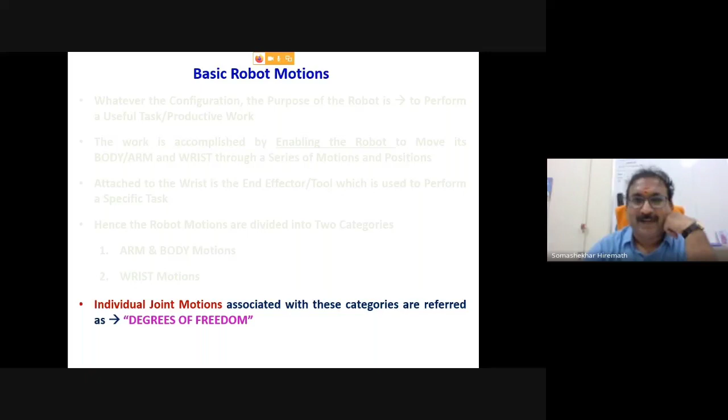Degrees of freedom are the motions. The minimum degrees of freedom required to place any object in space is 6, as I have told you: 3 major axes and 3 minor axes.

Let us see what is this arm and body. Now I am showing you the base here. Please see the base, and then the arm and body, all arm and body. The end is called a wrist. I've written here wrist assembly. Wrist assembly is like either a 2-fingered hand or a 3-fingered hand, whatever it is.

Now I am showing you the arm and body assembly motions. You'll concentrate on the axis I have mentioned here: rotational axis, vertical traverse, radial traverse. These are called arm and body motions.

Let us see what these are. What is a vertical traverse? Vertical traverse means up and down motion of the arm. You'll see the axis directions I mentioned here. Vertical motion means the whole body has to move up and down. It is called vertical traverse, since I already pivoted here.

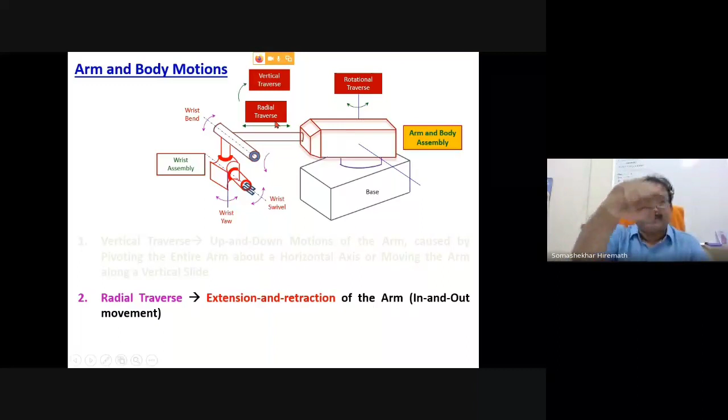Then what is a radial traverse? Here, this is a wrist. You have to take the wrist in and out, in and out. Radial traverse means I will take it like this, using a prismatic joint. You will move up, extension and retraction of the arm - it is in and out motion of the arm.

Next, one more is rotational traverse. What I will do is move the whole body around the pivot point, meaning rotation of the whole body around this rotational axis. These are called the arm and body motions.

Then I will come to the wrist here, and how the axes are defined. I have marked the wrist assembly. Now let's see the wrist bend. Remember, the wrist means you don't involve the full arm - you will move only the wrist. Look here, how I am moving up and down, left and right, and rotating. These are called wrist bend and wrist swivel.

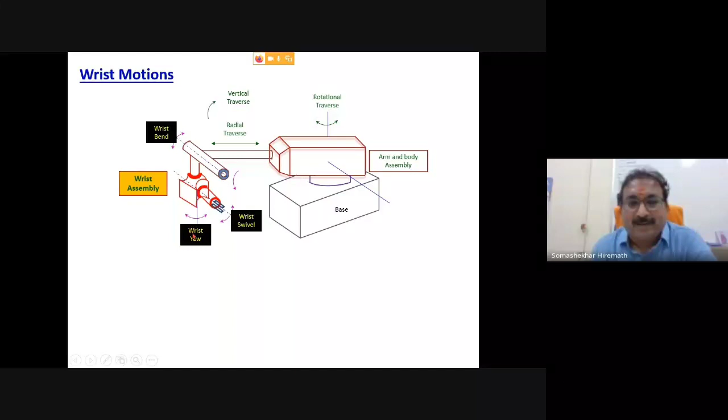What are those? Wrist swivel means - see, my front fingers, how I am moving them - look here, it is a rotation. This is called wrist swivel, rotation of the wrist. Then wrist bend - you'll see my front part only, up and down movement of the wrist alone, without worrying about the arm and body.

After doing the X, Y, Z motion, I'm positioning by using the wrist - up and down motion of the wrist. Then the wrist also allows right and left swivel, like this.

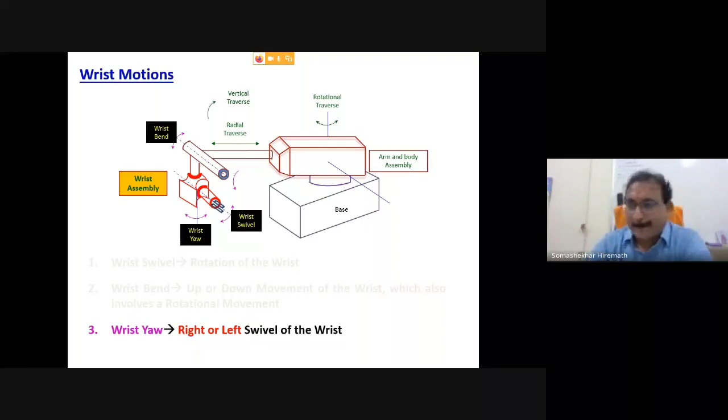Uma, Jyotishri? Yes sir, no problem, one minute. You are seeing my hand also, hand and finger. Yes sir, yeah, yes sir. Your video is good, no problem. Thank you very much, thank you.

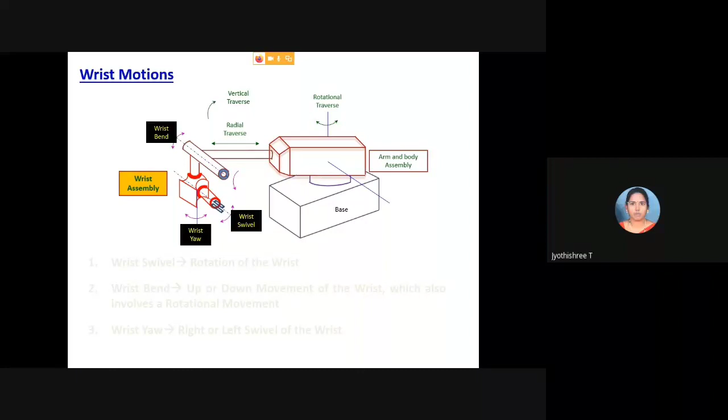Switch off. Now we know the arm and body gives 3 degrees of freedom, meaning to move X, Y, Z. After moving X, Y, Z, I am reaching the point in space. Then I will orient - orient means using wrist bend and wrist swivel to position. I will rotate along the x-axis, y-axis, or z-axis, or move up and down, or left and right. You don't bother about arm and body for this. Arm and body is used to place the object - that's the major axis, X, Y, Z. The wrist assembly motions are called the minor axis - theta x, theta y, theta z.

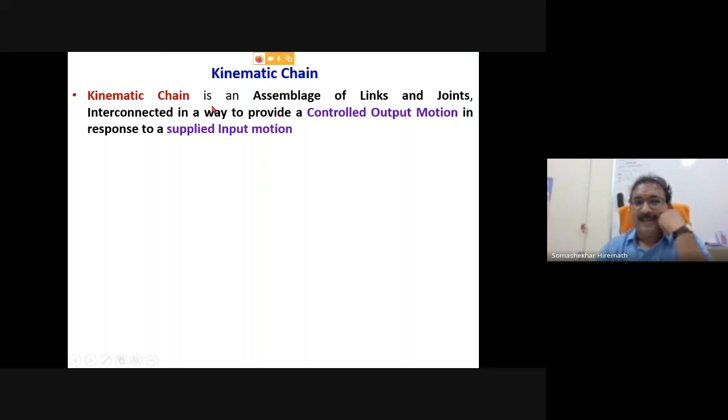Next, what is this kinematic chain? A kinematic chain is the assembly of links and joints. Remember, it is an assemblage of links and joints interconnected in a way to provide a controlled output motion in response to the input motion. Very simple - kinematic chain is an assemblage of links and joints. Links are rigid bodies - like this pencil I am showing is a link. But a joint is something that moves, either a rotary joint or a prismatic joint.

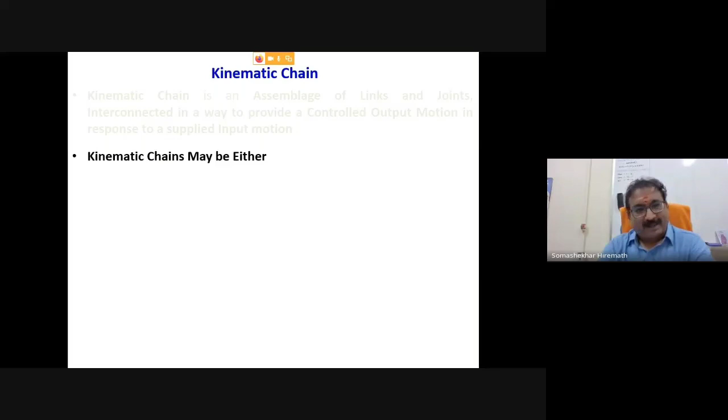These kinematic chains may be of open type.

As seen in all industrial robots, it is called serial linkages or tree structures. Closed type kinematic chains are what you will call Stewart platforms. They are also known as necklace type, like parallel manipulators. All these come under the closed type of kinematic chain.

Now what is very important is kinematic pairs - the types of joints used in robotics, because there are different types of joints. This is very important to understand in robot kinematics: kinematic pairs, also known as types of joints. What type of joints are we using in the robots? The kinematic pairs are the connection between the pair of bodies, links and joints.

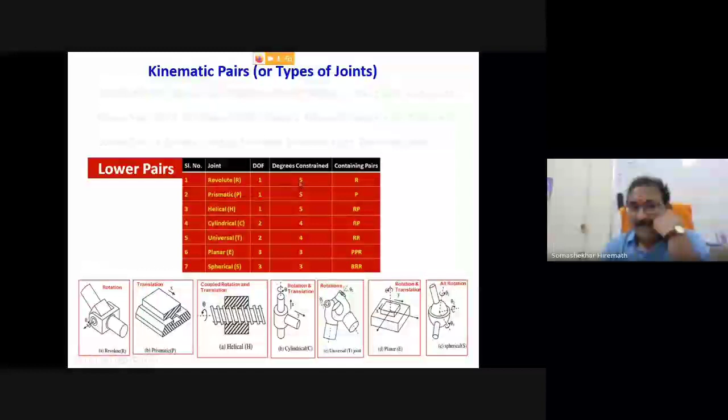The first one is the revolute joint. What degree of freedom does the revolute joint have? 1 degree of freedom - you rotate along this axis. If theta x is allowed, along x, then y, z are constrained, and x, y, z all are constrained for other motions. So degree of constrained motion is 5, since total degree of freedom is 6. Revolute joint has rotation along any one axis, only 1 degree of freedom, and it is represented as R.

Prismatic joint means P. Prismatic is a sliding motion, translational - you extend and retract the end effector. For example, your piston and cylinder is a prismatic joint. It only extends and retracts, 1 degree of freedom. Other degrees are constrained, meaning arrested in all degrees of freedom. It is called P, for prismatic.

Helical joint is there, again 1 degree of freedom - don't think it is 2 degrees. It is a coupled rotation and translation, that's why it is called 1 degree of freedom. Degree of constraint is 5. It's RP, even though coupled, meaning rotation as well as prismatic movement.

Cylindrical joint - how many degrees of freedom? 2 degrees of freedom. You'll move up and down like a prismatic joint, and also revolve. That's why it is 2 degrees of freedom, with constraint being 4.

Universal joint - again 2 degrees of freedom, RR. It will revolve along this axis and revolve along this other axis as shown here.

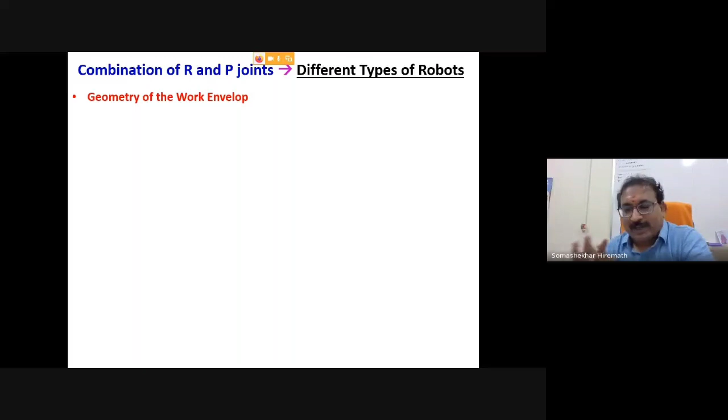Then you will see combinations of R and P. R means revolute and P means prismatic, up and down or left and right, whatever the move. You will get different types of robots. Very quickly I will show you these things.

The geometry of the work envelope is based on this. If you see Cartesian, all are prismatic joints, total revolute joint is 0 in the Cartesian coordinated robot. Cylindrical, you'll see only 1 rotation, others are prismatic. The type of revolute joint is 1. Why it is important, I am telling you later.

Spherical robot, 2 are revolute, 1 is prismatic. SCARA is also similar type, RRP, meaning 2 revolute joints are there. But in articulated robot, all are revolute joints. Type of revolute joints is 3.

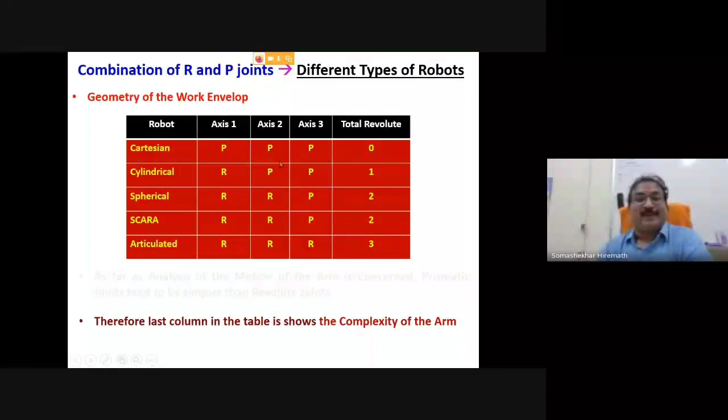The prismatic joints are very easy to model, but if the number of revolute joints increase in the robot, your complexity of matrix manipulation or calculation increases. Remember the severity in robot kinematics. As far as analysis of motion of the arm is concerned, prismatic joints tend to be simpler than revolutes. Therefore the last column in the table shows the complexity of the arm. If R is increasing, complexity increases. Only P is very easy, because only X, Y, Z motion, no rotation.

Please remember, friends. Now very quickly I will show you the Cartesian coordinate robot, also known as rectangular coordinate robot. What is that? Prismatic joint, PPP, as I told you. You will see the sketch here. You will move this whole arm up and down, or extend and retract, and also move this wrist in and out. All are called prismatic joints, nothing but your piston and cylinders, a very easy example for the hydraulic actuator.

Then sliding joint, up and down motion, please see the sketch also, friends. Another one is in and out of the whole arm assembly, sliding joint, back and forth of the wrist. So the work volume you will get as a rectangular box, you'll see here in this sketch, rectangular box.

What is this working volume, how will you get it? All are in extended position only. Please remember, this is fully extended, this is also fully extended, without the wrist, without the tool. You will trace it, and you will get the rectangular box, meaning your working range is only this. Beyond this, robot can't do. Meaning, while deciding the work volume is very, very important.

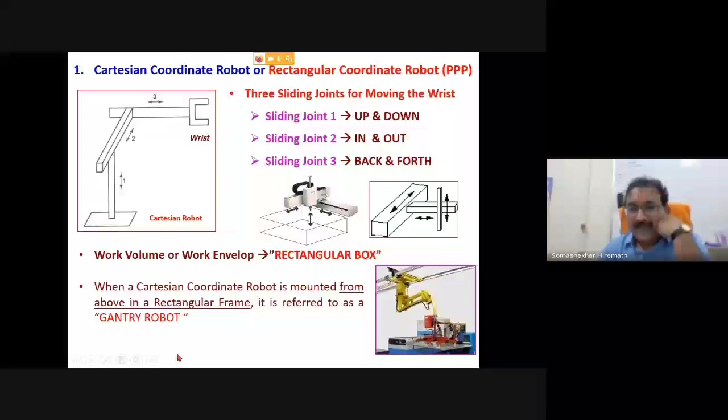When the same Cartesian robot, what we call rectangular coordinate robot, hangs from the top frame, it is known as gantry robot. Gantry robot is nothing but Cartesian coordinate robot. You'll see here how to trace the work volume in the extended position.

Also remember, Jyotishri, all people will remember, the MATLAB codes are there, well developed codes. You give the assignment to students to draw all the work volume, provided you give the link length and joint angle, all you will give to students. The students will submit the work, they will very easily do it in MATLAB to trace the work volume.

Now we'll see the cylindrical coordinate robot, what we call only one revolute joint is there. It is also known as RPP, as I already told you. One revolute, two sliding. Referring to this figure, you'll see what is a revolute joint. One, it will swing the arm back and forth, it rotates, the whole thing will rotate around this.

Sliding joint 2 moves the wrist up and down, you'll see the axis marking. Sliding joint 3 moves the wrist in and out, in and out.

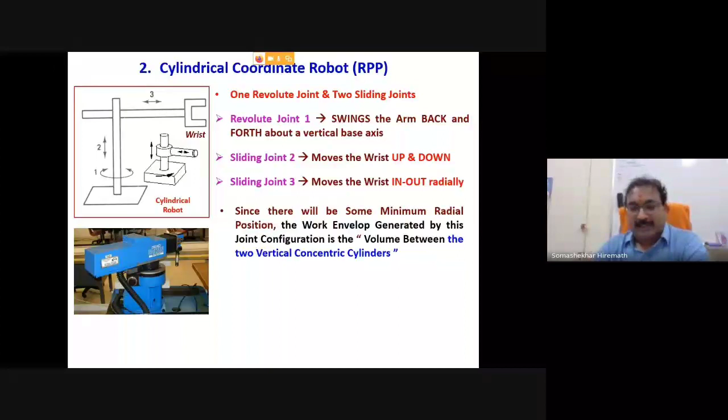Since there is some minimal radial distance because of the joint, the work envelope generated by this joint configuration is the volume between two vertical concentric cylinders, as shown in the figure, because of the diameter of the link. You get the work envelope as two concentric cylinders.

Here, don't attach any wrist. All are in the extended position. You sweep it along the axis and you get the work volume.

Now we'll see the spherical coordinate robot, RRP. Two revolute joints are there. One revolves along this axis, and another moves the wrist end up and down, rotating along this pivot point.

Revolute joint 1 swings the arm back and forth about the vertical axis. Revolute joint 2 pitches the motion up and down, as I told you. Then the sliding joint moves the wrist in and out.

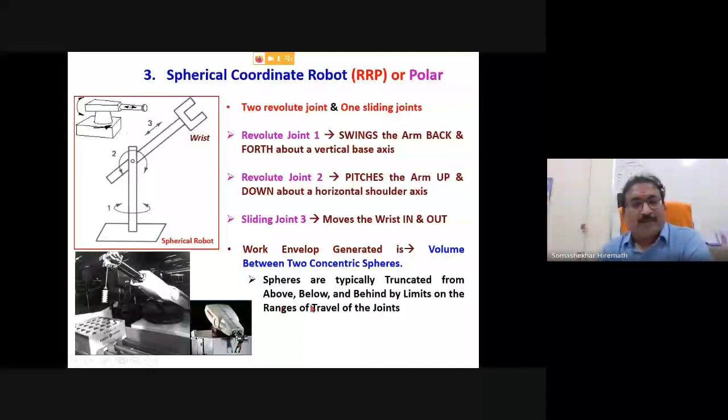Then how to get the work volume? All are in the extended position. The work envelope is a volume between two concentric spheres. These spheres are truncated from above, below, and behind by the limits of travel, because the robot should move. So you get the work envelope like spheres with the top and bottom removed. This is the work envelope of the spherical robot.

Now SCARA is also the same thing, friends. Again I am using 2R and 1P, but the speciality of this SCARA is Selective Compliance Assembly Robot Arm, abbreviated as SCARA. The term SCARA was coined by Hiroshi Makino, the inventor of this new class of robot for the assembly of printed circuit boards and other electronic devices with a flat geometry.

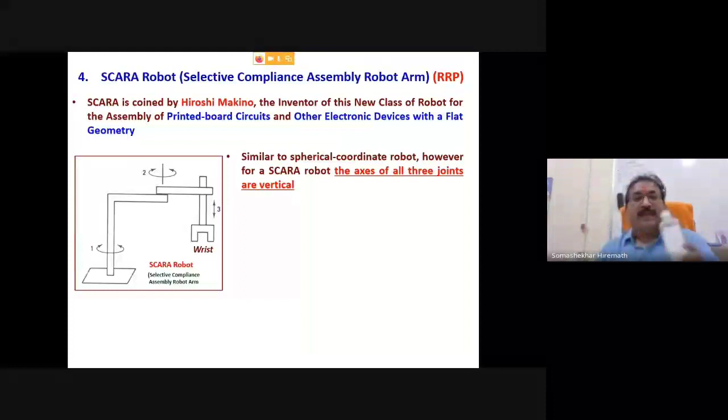Similar to the spherical joint, the SCARA's axes are all vertical. The axis movements are vertical only in the SCARA robot. See here, friends, one is revolving about the vertical axis, again it is revolved here, then it moves up and down in vertical position only.

Revolute joint 1 swings the arm back and forth, similar to the previous one. Revolute joint 2 swings the forearm back and forth. And the sliding joint moves down and up. This is the SCARA assembly. The special thing is that all the axes are vertical only in the SCARA robot.

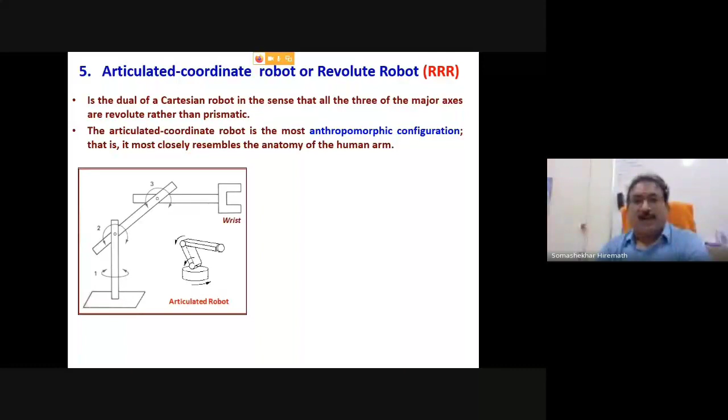The last one is the articulated coordinate robot, called the RRR robot. Very complicated, all are revolute joints only. It is a dual of the Cartesian coordinate robot in the sense that Cartesian is all PPP, while this is RRR, that's why I'm telling you all the axes are now revolute joints. The articulated coordinate robot is the most anthropomorphic configuration, most closely resembling the anatomy of the human arm.

Revolute joint 1, similar to before, swings the arm back and forth about the vertical axis. You'll see all these parts swing. Revolute joint 2 pitches up and down, the whole body moves up and down. Then revolute joint 3 pitches the forearm up and down about the horizontal elbow axis.

These joint motions create a complex work envelope whose side view cross section typically looks like a crescent-shaped divider. It is very critical. If done in the extended position, the work envelope you get looks like this, similar to the anthropomorphic characteristics of the human arm.

Jyotishri. Sir, it's okay sir, good, it's doing well sir. Very good, because I want to know connectivity, since I'm not seeing anyone, that's why I'm asking you in between, please. No problem sir, I'm here only, sir.

Now we go to robot kinematics. What is robot kinematics? Robot kinematics is simply the study of robot arm motion without considering the force and mass properties. Understand this, in robot kinematics I am not considering any force and mass properties, only I will study the motion of the robot. It deals with position, velocity, and acceleration of all the links without considering the forces or torques that cause this motion. It is simply defined as the analytical study of the geometry of robot arm motion with respect to a fixed reference coordinate system.

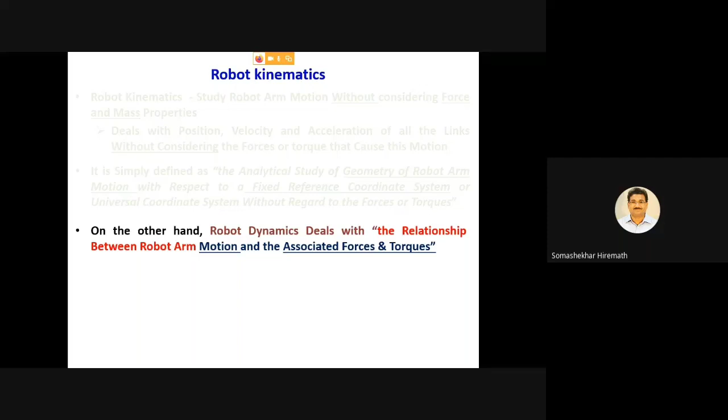On the other hand, robot dynamics, I will not touch this, it is a very big and tedious study, similar to kinematics but considering the forces and torque. Here you will get the Jacobians and many things, but here I am also considering the mass properties.

Robot kinematics deals with aspects of redundancy, collision avoidance, and singularity avoidance. If you understand robot kinematics very neatly, studying dynamics becomes very easy, because all the basic fundamentals are in robot kinematics. I request all teachers to teach up to this level, then you are converting students into very good engineers in robotics, because later it's only about considering forces and mass properties.

Even though matrix manipulation is very big, now powerful processors are there, you will implement in the computer, they will do all dynamic things, no need to worry much. But kinematics is very, very important. Most colleges are also teaching that, which is good, but you should teach it very nicely.

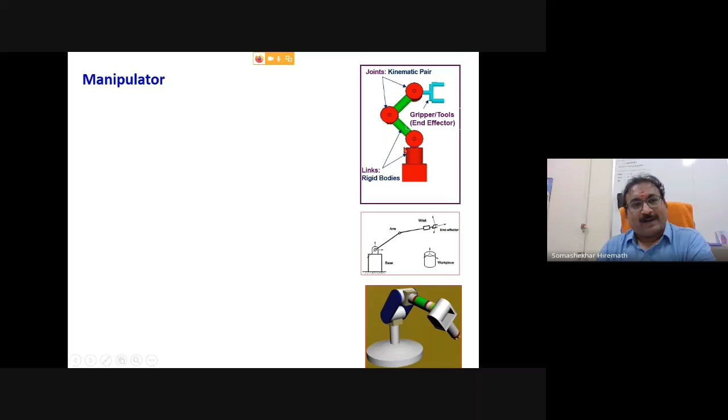You see the manipulator, what is this manipulator? This is called a series manipulator. A manipulator is physically several links connected to each other.

See friends, in this figure: green and another green, one more red here below - all are called links. What are links? Already told you, links are the rigid bodies. Then these links are connected with the joints.

Circles are there, they are called joints, what I will call kinematic pairs. We have already discussed these. Generally we are using - now I am showing Revolute, you will use prismatic also. The joints connecting the links is linear or rotary or sometimes both.

Often, the base link is connected to the ground or a foundation. Please remember, it is called the base link L0, the joint is J0, where you are attaching to the fixed platform. Until you fix this, I am not able to study the motion because all our motions are relative. That's why the ground link or ground joint is known as arrested.

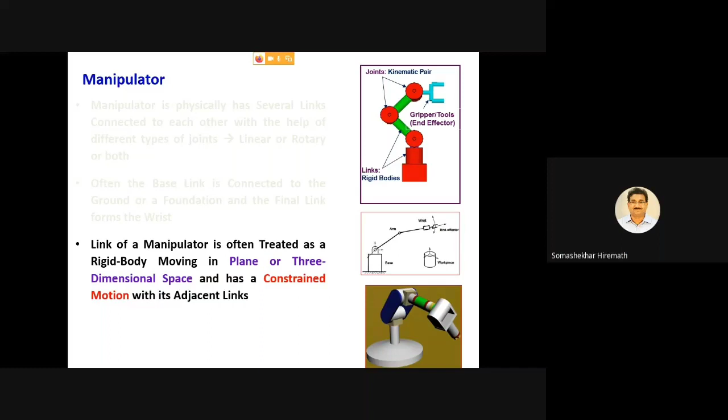The final one is a wrist, which can be moved based on the previous joints. A link of the manipulator is defined as a rigid body moving in a plane or three-dimensional space and has a constrained motion with the adjacent links.

Physically, a link has - if you take any link, you'll see the green one link, it is connected with two joints, correct? See here, a link has at least two nodes. If the link has two nodes, it is the simplest case, known as a binary link.

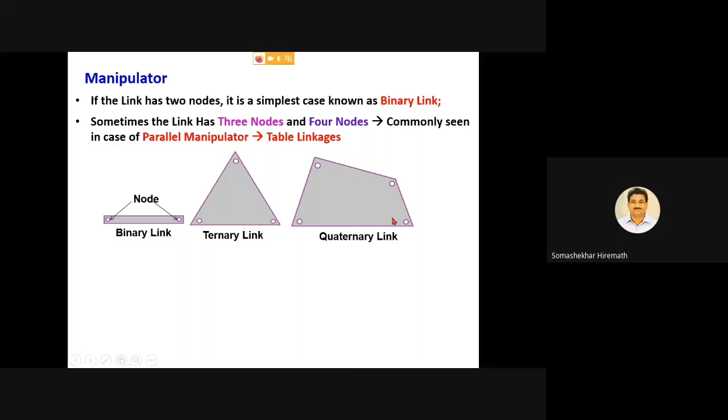But here you will attach 4 joints, a quaternary link. How many nodes are there? 4 nodes here. Generally, they are used in hexapod platforms or Stewart platforms.

Now we are not dealing with the Stewart platform, correct? Top plate, bottom plate, you will monitor it using all these types of prismatic joints or rotary joints, whatever it is. You've seen flight simulators - that's a closed type hexapod or Stewart platform.

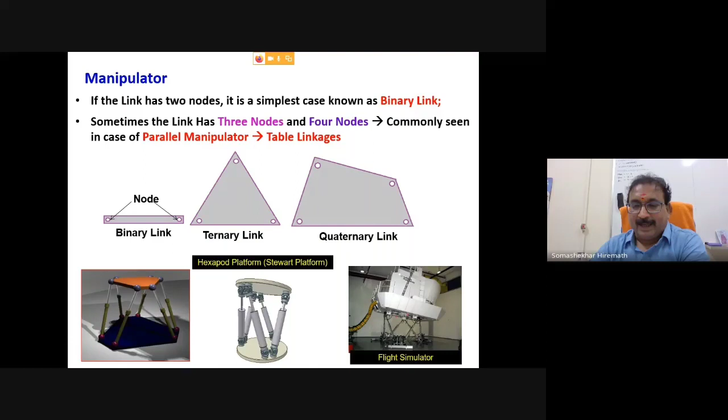In the whole robotics class today, it is only on the serial manipulator, meaning I am using the binary link, only the binary link. So the connection between two or more links at their nodes allows some potential motion between the connecting links, linear motion or rotary motion.

Please note, the joints in robotics are driven through either electric motors - please remember, friends, these are called actuators - electric motors, hydraulic cylinders or motors, both are there. Hydraulic motor is also there. Pneumatic cylinders or pneumatic motors.

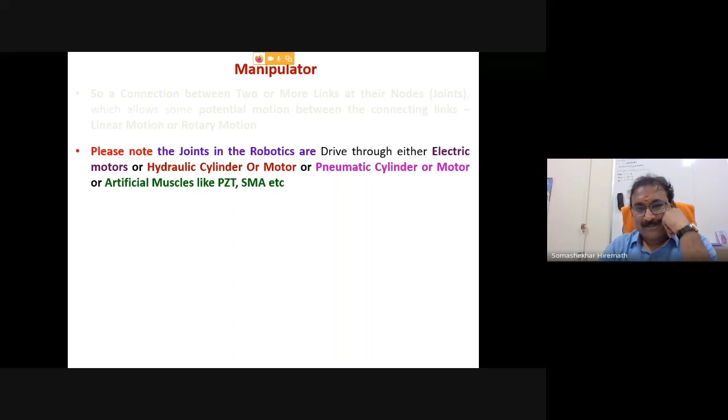Artificial muscles. Yesterday I showed you some of the parallel manipulators driven through SMA wires. These are called artificial muscles. Please remember, friends, links are joined through the actuator, what I will call electric motors, a hydraulic cylinder, a motor, pneumatic, or artificial muscles.

What is the duty of the actuator? Actuator will convert one form of energy into another form of energy. Please remember, electric motors will give only rotational motion. Hydraulic cylinder, like a prismatic, in and out. But hydraulic motor, again, it is a rotation. Pneumatic cylinder, again, in and out. Motor is rotation. Similarly, you will use for artificial muscles.

When this motion has a predetermined path, irrespective of applied forces, the joint is said to be a kinematic pair. Meaning cylinders will give only linear motion, while motors will give only rotary motion. It is called kinematic pair, as I have told you in the previous slides.

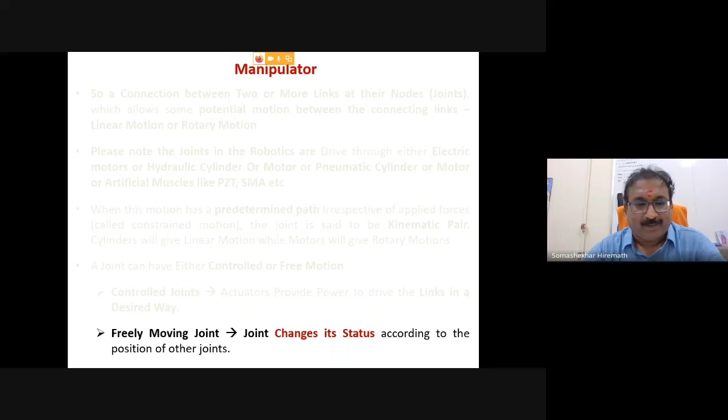A joint can either have a controlled or a free motion. Controlled joints are what I will call actuators, providing power to drive the links in a desired way. Free motion means the joint changes its status according to the position of the other joints.

Now we'll see how to number the joints. In kinematics, while calculating the DH parameter, numbering the joints and links is very important. Very quickly you will see this. I am showing you here the one-to-one relation. All you have to do is like this: base is arm, wrist, end effector is last. You'll see here also the same way.

Always you will start, friends, numbering the links and joints from the base. From the base it is link 0, L0, joint 0, arrested in all degrees of freedom. Then the next link is represented as L1. Next link is called L2. Like this it goes on towards the end effector. Please remember, friends, I am starting from the base and moving towards the end effector.

Similarly, joint J0, J1. Here also you'll give numbers if you want. J0 is like this, J1, J2 like this. You will grow. This J1, J2, J3, whether you are using the revolute joint or a prismatic joint or whatever it may be. But you will see, friends, the next one I have marked here, NOA, very very important.

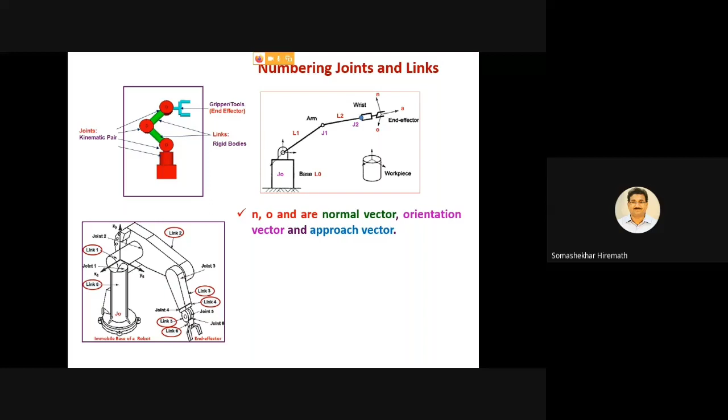These NOA are normal vector, orientation vector, and approach vector. What is approach vector? If the arm is like this, it is away — you'll see here, away, that's approach. O means opening and closing of the gripper, the orientation vector. Then N means normal to A and O. Each is represented along the x-axis, y-axis, z-axis. That's why AX, AY, AZ, NX, NY, NZ, OX, OY, OZ. I'll tell you how it is representing later.

Now remember, NOA is called directional cosines. These are called directional cosines, because, please remember friends, this method of determining NOA means it is directional cosines. Some people are using the Euler angle method, theta, phi, psi — that is called Euler angle representation. That is different, we don't bother about that now. These NOA, which I am attaching to the end effector end, are known as directional cosines. They are represented in matrix form. I'll show you later.

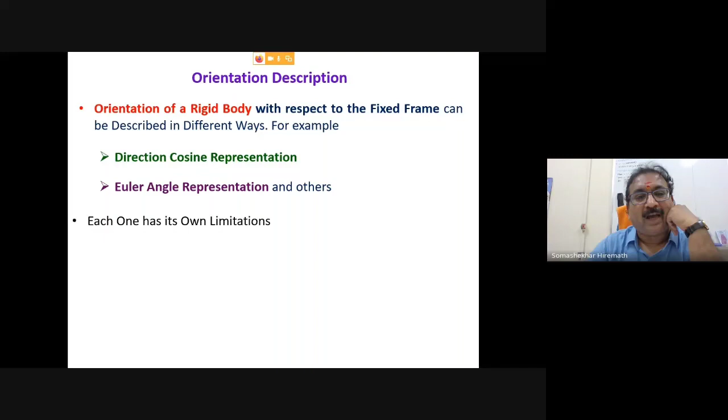Now, orientation of a rigid body with respect to the fixed frame can be described in different ways. As I have told you, one is directional cosine representation, another one is Euler angle representation. Each one has its own advantages and disadvantages. Most colleges are teaching directional cosines, but at IIT Madras, we are teaching both methods to represent the orientation of the frames.

Each one has its own purpose, and if necessary, one may switch from one representation to another during robot motion control to avoid the former limitations.

You'll see now how the frames are represented. How many types of frames are there? Two frames: one is a reference frame, which is always attached to the ground, and the object frame, which is attached to the object, meaning nodes.

NOA, as I have told you, each frame is having NOA. This is a vector quantity, meaning direction is there and magnitude is there. Your direction may be anything; now I'm attaching like this, no need to worry about how it is oriented.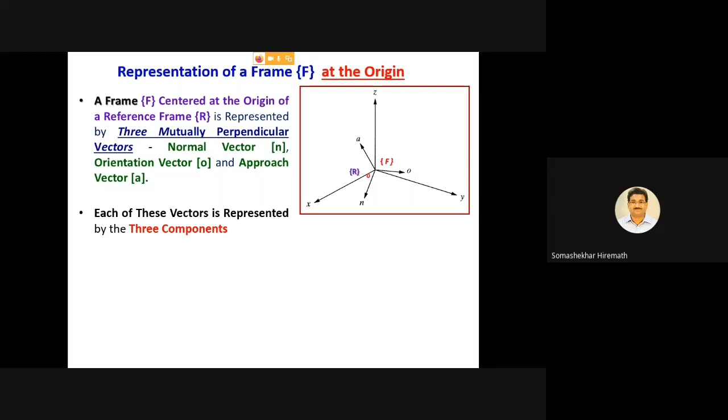Each of these vectors is represented by three components. Along the x-axis you'll represent nx, ox, ax. Similarly, along the y direction, ny, oy, ay. And along the z direction, nz, oz, az. These are called directional cosines, and they are represented in matrix form.

Remember how it is representing: the F frame is representing like this: nx, ny, nz, ox, oy, oz, ax, ay, az. All are vector quantities. Each frame consists of a 3 by 3 matrix like this. The frame is nothing but NOA. If you expand in the x direction, y direction, z direction: nx, ny, nz, ox, oy, oz, like this it will go.

If the frame is not at the origin, it is somewhere else away, then you have to define the distance: how much it is along x, dx; how much along y, dy; how much along z, dz. Correct?

Now how to represent? You will see this frame now. The frame F is away by d units from the xyz. Then what is required? How to define this? You will see now here. This can be represented as: nx, ny, nz, 0, ox, oy, oz, 0, ax, ay, az, 0, dx, dy, dz, 1.

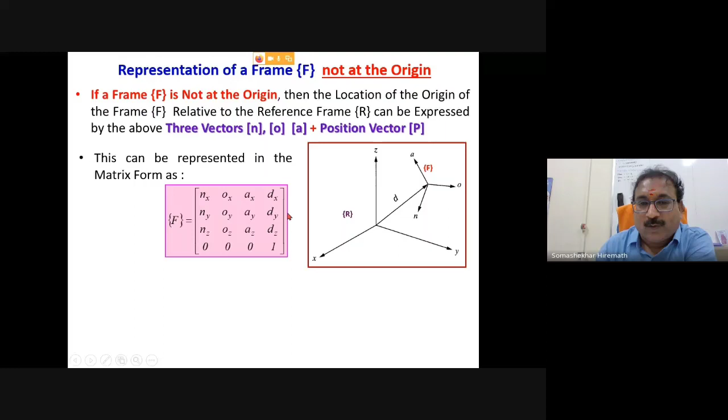What is this? I will tell you: this is a 4 by 4 matrix, known as the homogeneous transformation matrix. Please remember this, it is very, very important. Each frame consists of a 4 by 4 matrix, and all of it we are representing in a 4 by 4 matrix.

That's why it is 0, 0, 1. The 1 means it is at full scale. If you want to make it half scale, you'll put 0.5, then everything will reduce to 0.5. This is the scaling matrix, the 0, 0, 1 that I am telling you.

If it is away from the origin, meaning again for example one more joint: this is one joint, this is the base joint, and one more joint is there. How to define how much it is from x, how much from y, how much along z? You have to represent it like this.

This 4 by 4 matrix, the homogeneous transformation matrix, is always a square matrix, used to calculate the inverse and multiplication of matrices, because the order of the matrices should be the same. Why I am representing it like this as 4 by 4: from now on, multiplication of matrices requires the rank to be the same, it is 4 by 4 only. One being 3 by 3, another 2 by 2, another 3 by 3 is not possible, friends.

That's why you will represent everything this way, even though the quantity is not there. For example, if you only moved along the x-axis, you will represent dx equal to 5 units, and put the others as 0, 0, nothing will happen. If you are only moving in the z direction by 5 units, you will put 0, 0, 5, like this.

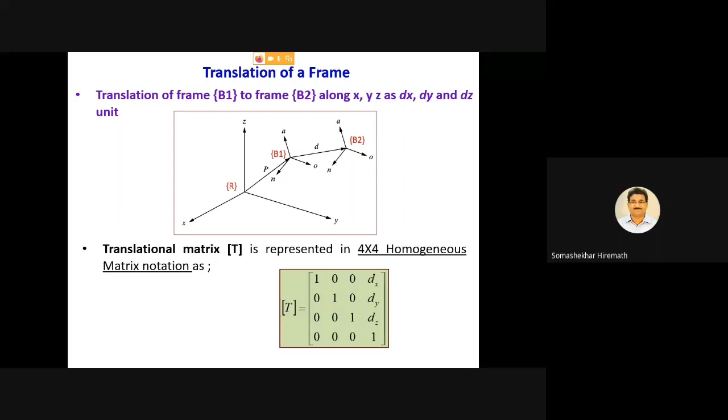But your representation is always a 4 by 4 matrix. Remember this: translation of the frame. Now what I am doing here: frame 1 and frame 2 are there. I moved this frame by d units; the same way dx, dy, dz you will represent like this. Now I moved one more frame, dx, dy, dz, you represent it the same way, as I have already told you.

Correct? Next is very important: coordinate frames of a two-fingered hand, meaning wrist motion, how the end is represented. As I have already told you in the previous slide, consider the two-fingered hand as shown in the figure. You use your hand like this, you'll see only the wrist level.

You will use only 2 hands as I am showing you. Then you'll attach this. What is an approach direction? Approach direction can be first identified along the Z axis. That's why it is called Z, always away from the end effector.

It is Z. Then the orientation O is open and close, you'll see friends, my hand, open and close. It is what we'll call orientation. Y, when the finger is the Y axis. Perpendicular to this is the normal.

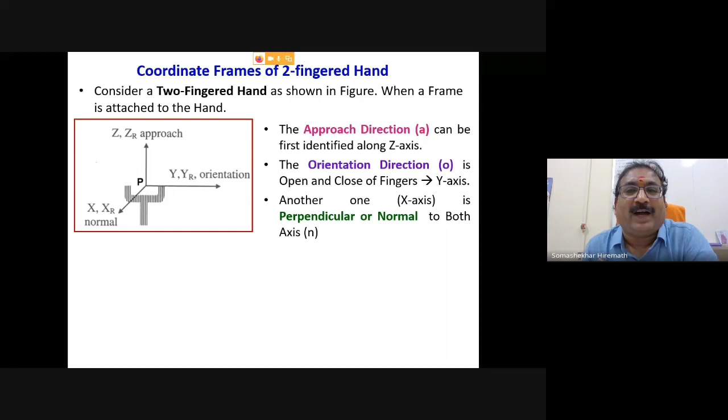Then you'll remember, friends, when I'm fixing this frame to the end effector, I will only fix Z and Y. The other is automatically fixed. You don't need to do all these things because X, Y, Z are orthogonal in nature.

Now I will teach you the orientation, how they are represented in the 2D plane and 3D plane. Consider the two-fingered hand, same here, P is there. In the 2D plane, P is represented like this. P is X, Y. In the 2D plane, point P is X distance away along the X axis and Y distance up. Then the radial distance is R.

I am taking P here at this point. How to define P here? How much it is from the X, how much it is from the Y. Then it is a radius. Let us understand this, how I am moving this in the 2D plane.

Now, the coordinates of P, there's a triangle, friends. Please remember the coordinates of point P is X, Y. What are the points? It is the coordinates. In polar coordinates, what is this X? You take this triangle, it has angle phi. X equals R cos phi. Similarly, Y equals R sin phi. You already know this trigonometry. What I did is calculate how much X is in polar coordinates, and how much Y is in polar coordinates.

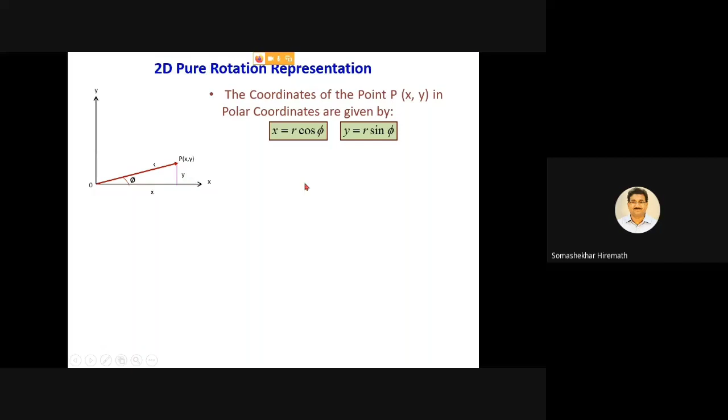Next, as the point P is rotated anti-clockwise, now I'll move this by theta, I will rotate this. Then what happens, friends? I moved like this, this P point is moved here. Then I want to calculate the remaining things.

Now, if I do this, the new coordinates are X dash. How to calculate X dash? Take this triangle now. X dash equals R cos(phi plus theta), because in this triangle, the whole angle is phi plus theta. If you expand this, R cos(phi plus theta) equals R cos phi cos theta minus R sin phi sin theta. You already know how to expand cos(phi plus theta).

Now you'll see, friends, here X dash equals R cos phi cos theta. R cos phi is nothing but X, so I'm putting X cos theta. Then R sin phi is replaced by Y here. What will I get? X dash equals X cos theta minus Y sin theta.

Similarly, I will get the Y coordinate, Y dash, from this triangle. Y dash equals what? R sin(phi plus theta). How to expand that? R cos phi sin theta plus R sin phi cos theta. You already know how to expand sin(phi plus theta). Now I will get Y dash.

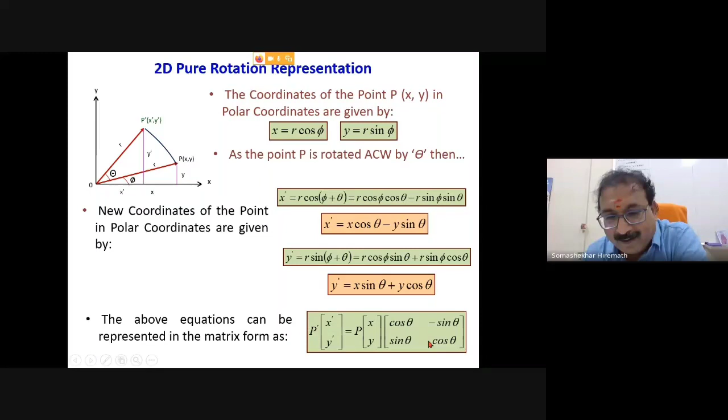If you represent this in matrix form, you can write it horizontally or vertically. Now I am representing the P dash point, which is rotated from the original point to here. How to represent the points: P, X, Y becomes cos theta minus sin theta. Look here how I am writing: X dash equals cos theta minus sin theta, and Y dash equals sin theta plus cos theta. Understand this, the rotation of the end effector point P in the XY plane.

If you do this in three dimensions, it's very complicated, friends. Now, previously you understood how I did it in the 2D plane, the XY plane. Now you have to rotate this point along X, along Y, along Z. Then what happens? I will get a 3 by 3 matrix. But very quickly I will show you this, one thing you have to remember.

Now I'm showing you how to write cos theta, sin theta in the identity matrix I. Please remember, friends, this is the identity matrix: 1 0 0 0, 0 1 0 0, 0 0 1 0, 0 0 0 1. You'll remember what it shows: it shows the orientation as well as the translation.

You'll see, friends, this is there. See here, this 3 by 3 matrix is a rotation, and this here is what I call dx, dy, dz. Previously what you are seeing is a translation. Keep in mind there is an orientation matrix and this is a positional matrix.

Now we have to write the rotation about x in the 3D plane. 3D means x, y, z coordinates. If I rotate the point in the y direction alone, how to write the matrix? If I rotate the point in the z direction, how to write it?

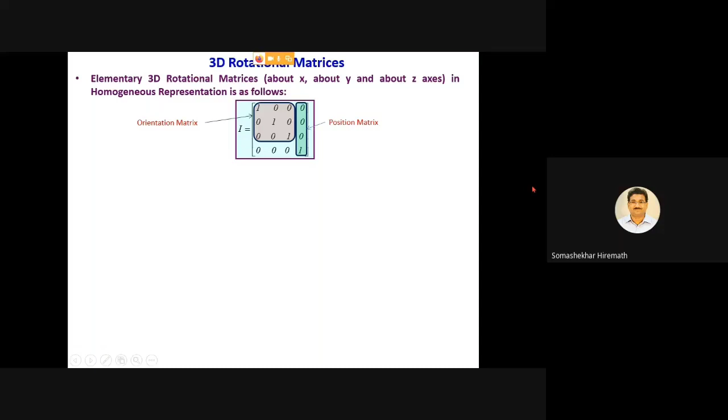I will have to remember, I will tell you. Look here, this is called rotation about x. This is rotation about y, rotation about z. It is only a combination of what you derived previously, cos theta, sin theta alone.

But how to remember this, friends? That is very important - how you are teaching the student. Because calculating it the way I did previously is not so easy in the 3D plane. But how to remember this?

Can you please think? Now I'll tell you very quickly how to remember whether it is rotating in the x direction, rotating in the y direction, or rotating in the z direction. Even in your sleep you should be able to write the 3-dimensional matrix.

How to remember: when writing the axis for rotation about x, you mark the first axis like this. For rotation about y, you cancel the y here and here. Z means the third axis, so you close the third one immediately - no need to worry about direction. Then what's left you fill in for x, fill in for y, because the rotation matrix is here only.

Filling this in, you'll remember, friends, always the diagonal elements are cos thetas. Diagonal terms are cos theta - see here, c theta, c theta, c theta, c theta, c theta, c theta. Remember, very easy: all diagonal terms are cos thetas. In the orientation matrix position, you will see cos theta, cos theta written top and down, cos theta, cos theta.

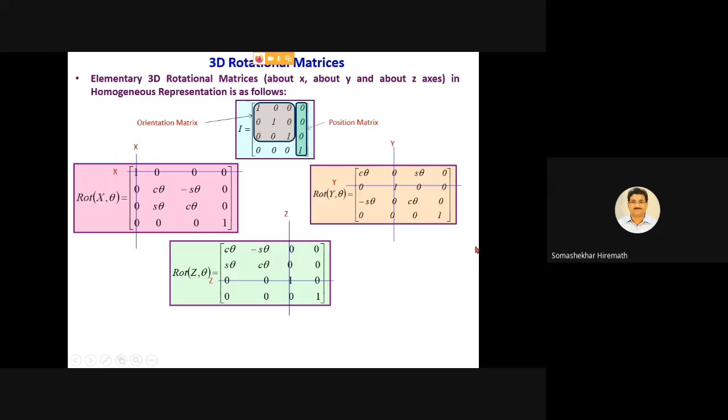Delta means you will draw the axis. Third, z means third row and third column will write. Don't write anything here, cos theta and sin theta. Then left out is here, correct? You'll see this orientation matrix here, left out is here. Then what you will do? Term all the diagonal elements are cos theta. You will write the cos theta. C theta means cos theta. Then up and down you will decide based on x-axis means -1 to the power of k, means 1 for x-axis, y means -1 to the power of 2, z means -1 to the power of 3. That will decide whether you will write off the diagonal minus sin theta or plus sin theta. Okay, this is very easy.

You remember this, friends, because I am using this everywhere.

Then very important thing is, as you know, the transformation and the mapping. What is this transformation and mapping? The matrix which describes the relative displacement of frame B from another frame R is known as transformation matrix, correct? If you take the two frames, A and frame B, then sometimes I will displace this frame B, sometimes I will rotate it. Then the whole thing is known as transformation matrix.

How it will be done? Changing the description of a point in space from one frame to another frame is called a mapping. The second frame is generated from the first frame through various operations. What are those? It may be rotated with respect to the first frame, correct? Then what happens? The orientation will change, or it may be moved away from the first frame, meaning only translational matrix comes into picture - how much you moved along x-axis, y-axis, z-axis, to get the second frame. Or sometimes what I am doing, I am rotating and translating. Both matrices will come into picture.

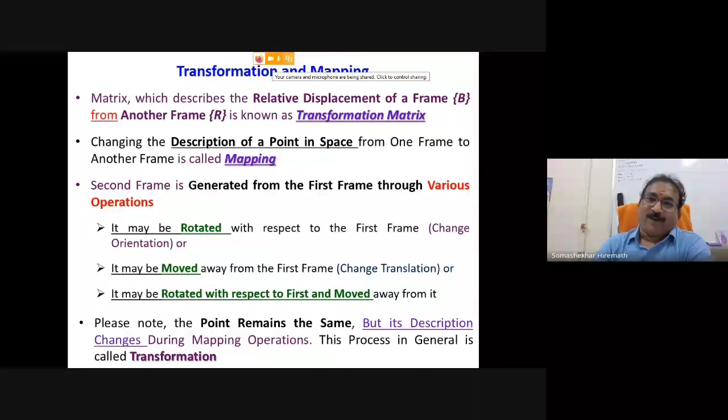Please note, the point remains the same, but its description changes during the mapping process. This process in general is called transformation. What is a transformation? Transformation may consist of either only translation, or a rotation, or translation, based on the sequence of operations you are performing in robotics.

Now we'll see, friends, what is this forward and inverse kinematics. Jyotishri? Sir, everything is correct, sir. Yeah, going smoothly. Okay sir, now see friends, the forward and inverse kinematics, how to do it.

Now we'll see the forward kinematics. In order to program the tool motion, we must first formulate the relationship between the joint variables, and position and orientation of the tool, how it is. Forward kinematics is known as direct kinematics also. You'll remember, friends, what it is. Forward kinematics is angle to position, meaning what?

I know the joint angle and the link length. I want to find out the position of the point, the end effector. Position means X, Y, Z. I want to know the end effector position. I know the angles of each joint. I know what is the angle - first joint is rotated by 30, third joint is rotated by 25. Then you tell me what is the X, Y, Z. That is called forward kinematics - angle to position, it is called direct kinematics, which is very easy.

What we are given now - link length is known, because you can't change this link length for any robot. It is always a constant link length. While selecting the work volume, all this thing, you'll decide how much link length, because it is a rigid body. It is given in the problem.

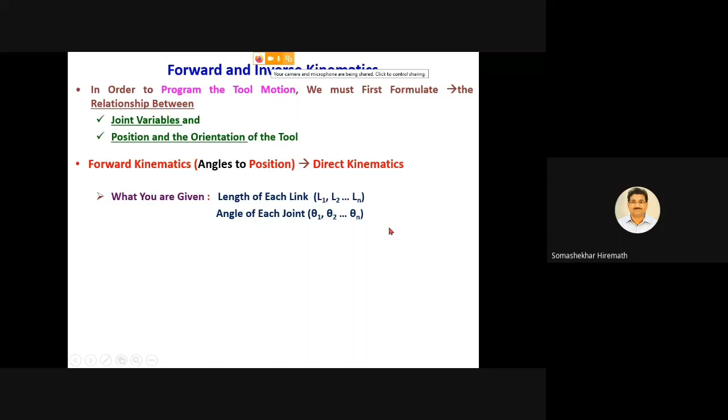What to find? Find out the position. What I am doing - position of the end effector, the last joint. What is its XYZ coordinate? It is called forward kinematics. Forward kinematics means what, friends? Angles to position - angles are given, link lengths are given, find out the XYZ position. It is a direct kinematics.

Inverse kinematics means opposite. Opposite of what? Position to angle. See here, I am giving the position of the end effector - X, Y, Z, say 10, 20, 30. Then you will find out what angle gives you that 10, 20, 30. That's why it is position to angles - inverse kinematics.

What are we given? Link length, as usual, and the position of some point on the robot - X, Y, Z coordinates are given. What do you have to do? Find out the joint angles, theta 1, theta 2, whatever is needed to obtain that. Any doubts now? Forward kinematics, inverse kinematics - very easy.

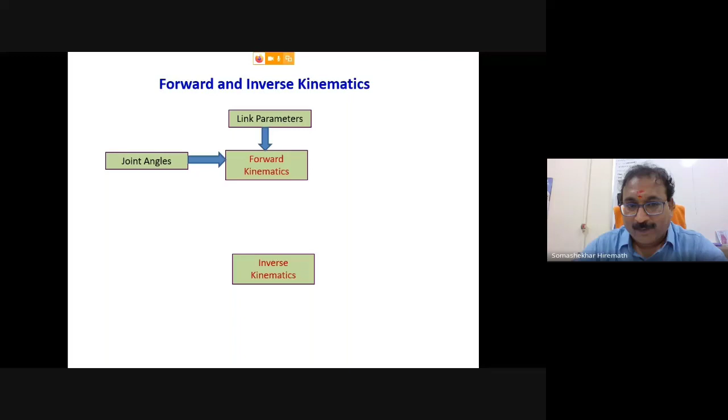I made this simple for you to understand. In forward kinematics, what is given? Link parameters - link length, link twist - all fixed parameters given in the problem, along with joint angles. What do you find out? The position of the end effector.

But in inverse kinematics, what do you have to do? The position of the end effector is given - how it is, where it is. Then the link parameters are given. What do you have to find out? The joint angles. This is called forward kinematics and inverse kinematics.

In forward kinematics, I want to find the position of the end effector. In inverse kinematics, I want to find the joint angles. Remember, link parameters are constant. Next, we'll go quickly because only 15 minutes remain.

The Denavit-Hartenberg representation defines 4 kinematic parameters - 2 link, 2 joint. Very easy, friends - if you practice, 3 parameters are fixed in the examination, and you only have to find 1 parameter out of 4. Remember, that's easy. 2 link parameters - link length and link twist - are fixed and given in the problem. For the joint, you only have to decide 1 parameter.

If it is prismatic, it is linear. If it is rotary, it is rotation, theta. The other is fixed. Remember, in Denavit-Hartenberg representation you have to find 4 kinematic parameters - 2 link parameters, 2 joint parameters. How to find out, we'll see.

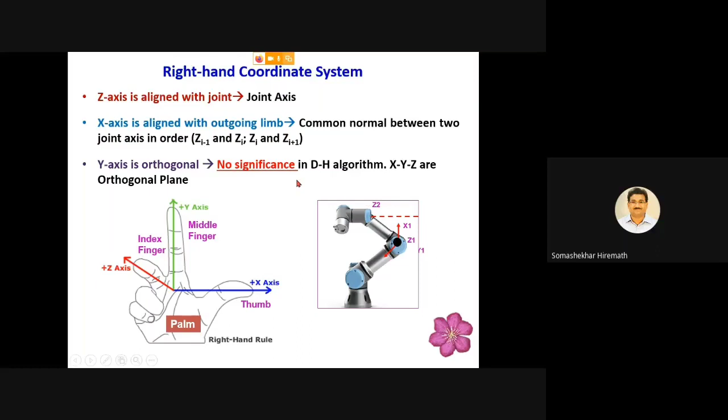X1 is aligned with the outgoing limb, common normal between the two joint axes, Zi minus 1 and Zi. Zi minus 1 means previous joint is Z1, and next joint is Z2. So Zi minus 1 is the previous joint, and Zi, or Zi plus 1, is the next joint. This will go on continuing, friends.

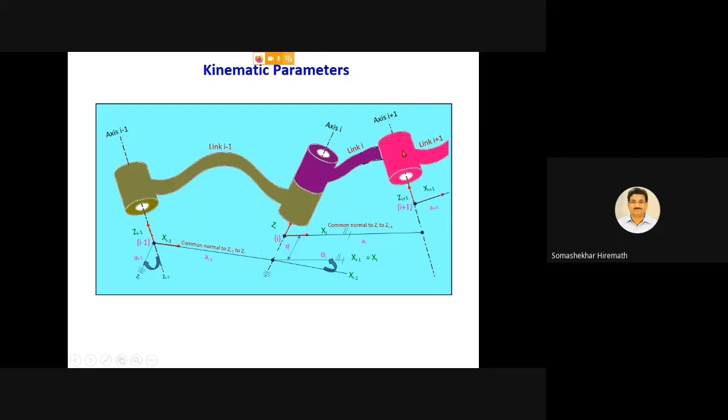Okay, let us see this DH notation very neatly. The Denavit-Hartenberg proposed a systematic and generalized approach of utilizing matrix algebra to describe and represent the spatial geometry of the link robot arm with respect to the fixed reference frame. They defined two link parameters, two joint parameters. In DH representation, one can assign the reference frame at each joint and define the transformation matrix relating the two successive frames, which is a homogeneous transformation matrix.

Let us begin the joint parameter. The relative position and orientation of the two successive links. Two successive links means the previous link I am taking as link I minus 1, and the next link is link I. Link I is the main link, and the previous joint is link I minus 1.

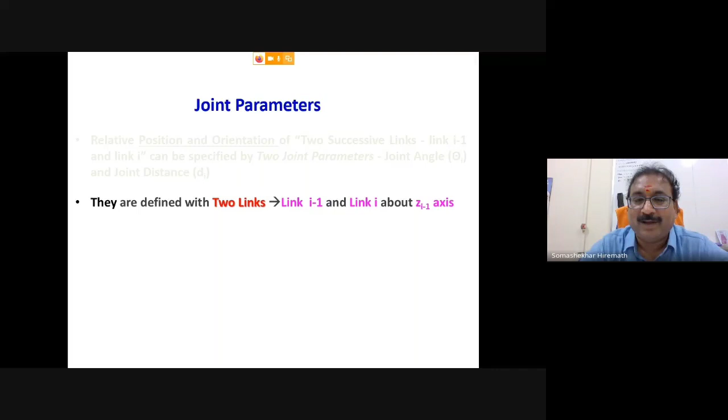This can be specified by the two joint parameters: joint angle and joint distance. What are the joint parameters? Joint angle and joint distance. They are defined with two links. If you want to understand the joint parameter, joint distance and joint angle, you require the two links: link I and link I minus 1, the previous one. About the Zi, you have to define these parameters about the Zi minus 1. How it is, I will tell you, no need to worry. So we need two links and one joint to define the joint parameters.

How it is, you'll see now. Consider now I am using joint I, meaning the joint connecting the two links. Next link is link I, this is link I minus 1. See here, what I did, friends, here I drew the link, two links. One link is called link I, and the other is the previous link, I minus 1. These two links are connected with the joint. Joint rotation, or whatever it is, joint axis is Zi minus 1. Please understand this, Zi minus 1. Then how to define the joint parameter, joint angle and joint distance, we'll see.

The parameters associated with joint i are theta i and di. They are defined with zi minus 1 in the figure, which is aligned with joint i. Let us see the joint angle. How to define the joint angle, friends?

The joint angle is the rotation of axis xi minus 1 about z. All you have to define is about zi minus 1 only. Remember, rotate this xi minus 1 about zi minus 1 needed to make xi minus 1 parallel to xi.

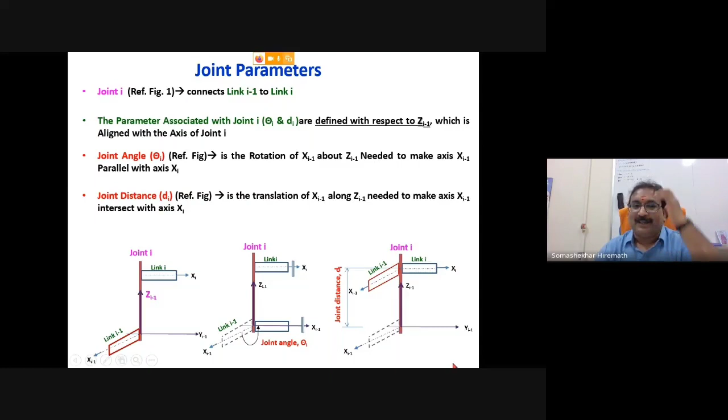Then if it is a rotary joint, what is that? How much I will rotate link i minus 1 to make link i minus 1 parallel to link i. Please understand this, that's why I'm telling you this. We are teaching you this 2-3 times in class.

This is the joint parameters. So theta i is, what is theta i here? How to define the joint angle? Theta i is the rotation about joint i or zi minus 1 until the link is parallel to the next link i. Di means what?

I'm moving this link i above such that this xi minus 1 axis intersects xi. When it intersects, that is called joint distance. Please remember, friends, either theta is there or joint distance is there, in the prismatic and rotary joints.

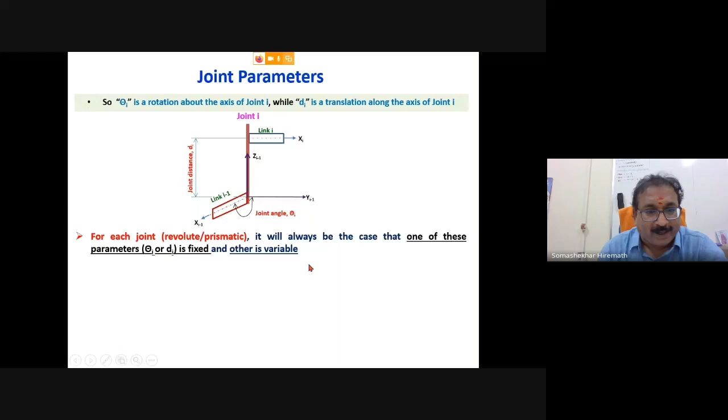For each joint, as I have told you, revolute or prismatic, it is always the case that one of these two parameters is fixed and the other is variable. For example, variability depends upon the revolute joint. Revolute joint, what is variable? Theta is variable. Revolute joint, theta 10 degree, 20 degree will rotate, but you can't move it.

You can't move the revolute joint, meaning di is fixed. Similarly, in the prismatic joint, you have to move the joint up and down, but you can't rotate. That's why it is called prismatic joint, with only 1 degree of freedom.

Please remember, friends, out of the 4 parameters, joint parameter and link parameter, the only variable parameter is theta or d. Theta means rotary, d is fixed in that. If it is prismatic, only movement is possible, rotation is not possible. You have to find out.

The other link parameters, 2 link parameters are there, called link length and link twist, which are fixed when I am selecting the particular links. How to find out, I'll tell you in the next slide.

Jyoti, is it going smoothly? Jyoti? Yes sir, yes sir. It's going, sir, no problem. How much you are understanding I don't know, but physical presence is required to explain this. If I am in front of you it is very easy, but I'll try to make you understand.

The link parameters are link length, ai minus 1, a1, a2 also will give, but why I am giving is to make it easy to understand. The link parameters are link length ai minus 1, link twist alpha i minus 1.

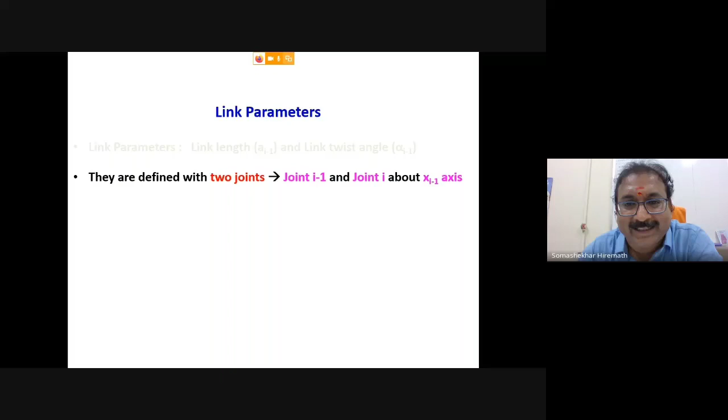You'll see, friends, how I defined the joint parameter. To define the joint parameter, 1 joint and 2 links are required. Now here 2 joints are required. Here they are defined with 2 joints, joint i minus 1 and joint i, but you define about xi minus 1. For the joint parameter, I took 2 links, link 1 and link 2, defined about z. But now here I am taking 2 joints and defining along x.

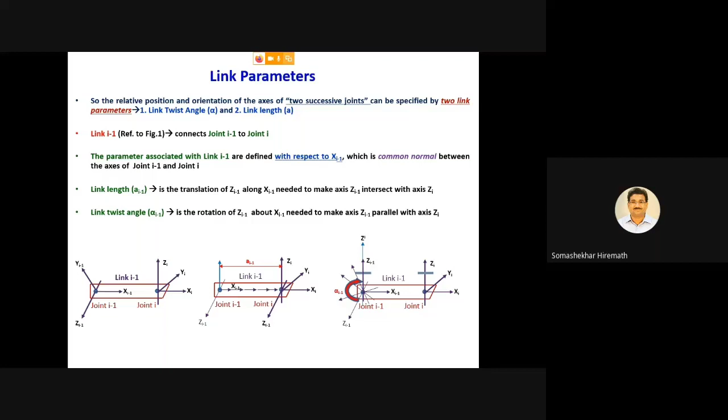Link length and link twist are fixed while selecting the particular geometry of the link in robotics. These are fixed parameters. The link parameters ai minus 1 and alpha are always constant and specified as part of the mechanical design. For an industrial robot, the link twist angle is usually a multiple of pi by 2 radians. Sometimes the axes of joint i and i plus 1 intersect, in which case the link length is 0.

Links of zero length occur, for example, in robotics with spherical wrist, where the last n minus 3 axes intersect. More generally, robots can be designed to have many of the constant parameters equal to zero.

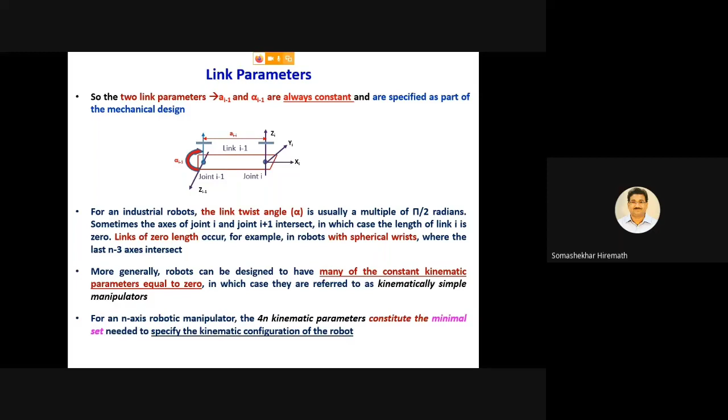In which case they are referred to as kinematically simple manipulators. For an n-axis robotic manipulator, the 4n parameters constitute the minimal set needed to specify the kinematic configuration of the robot. Let us see these kinematic parameters.

For each axis, 3 parameters are fixed, and 1 parameter alone is varying. If we are using the prismatic joint, moving up and down, meaning D is variable, theta is constant. If you are using the revolute joint, theta is variable, D is constant.

If it is a prismatic joint, what is variable? Prismatic means linear joint, so joint distance is variable. Others are fixed. Please remember this, friends.

Here, the very important part is mapping, which is challenging in the DH parameters. Other things are the same, as I told you, for SCARA robot and rectangular robots, how thetas are taken into account.

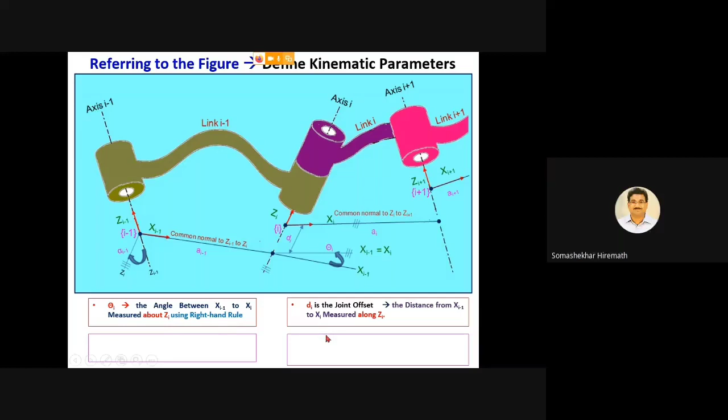This is the same: theta is the angle between xi-minus-1 to xi, measured about z. This is the distance between xi-minus-1 to xi, measured along z. Always theta is measured about the z axis. Then alpha i is measured about the x axis, as I have told you.

Now we'll see some simple arm matrix, how to map it very quickly. So time is up.

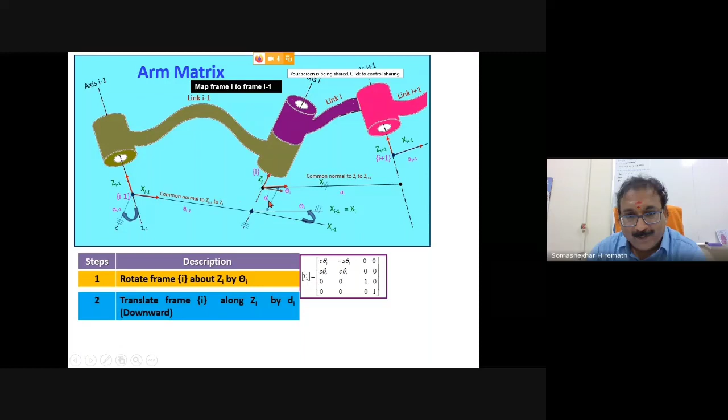Then what I will do? Now, after rotating this, I am moving this frame down by d distance. Translate the frame I along the Zi. I will move slowly this down by di distance. Just see, I moved now. See, friends, I moved the frame I here now.

Now what I will do next, friends, I move along this, this matrix is represented like this. See, T2 is, I am translated along the Z by di distance, that's why 0, 0, di. After moving this frame, how I will bring here? Move along the link length, correct? Again, I will move this along the link length back. Link length is AI, correct?

What I will do? Again, I will translate along the Xi minus 1, Xi axis by AI. Again, I am translating, T3 equal to what? T3 is, see here, along the Xi mode, AI minus 1.

Now we'll see, friends, it is rotated. Then I will rotate it by the angle alpha I minus 1 to match this. What I will do? Rotate I about Xi minus 1 by alpha I. Alpha I is a twist angle. What is along the X will move. What is a matrix? Along the X matrix is this.

Now, how to get the arm matrix? Our overall transformation matrix is very simple, friends. What you will do? I rotate it, I translate it along d distance, translated along the AI, rotated. Meaning you will represent this as a composite transformation matrix. Overall transformation matrix, friends. This is whatever a matrix I am written like this.

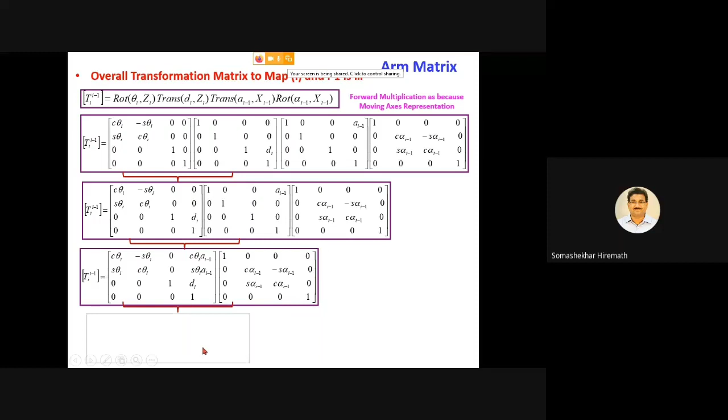Then again you will do multiply by these two, you will get this matrix. Again these two you will multiply, you will get this. This is what it is. I'm mapping the frame I minus 1 to I. How to represent, you will see. Mapping the I minus 1 to the base.

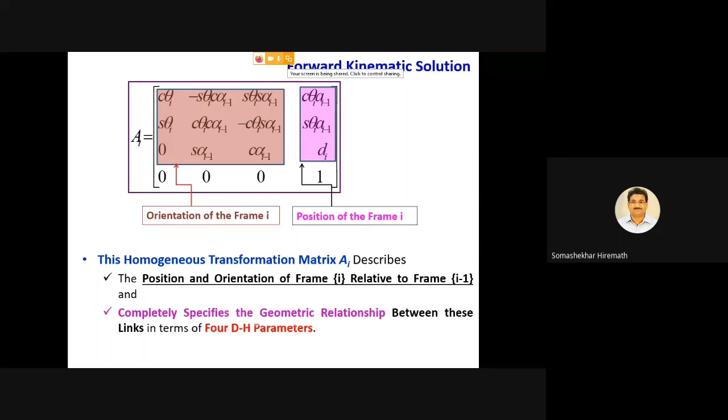If I'll ask you, this is finally I will get like this. This is an orientation matrix and this is a positional matrix. Meaning you will see when I will map, what it will do, I am mapping the I minus 1 to I. This is a matrix. This is a homogeneous transformation matrix, describes the position and orientation of I frame relative to I minus 1, and completely defined by the DH parameter.

You'll see in this whole matrix, what are the things there? Cos theta, sin theta, and alpha is there, AI is there. Apart from that, nothing is there in the matrix, friends. This is what we will call forward solution.

How to get, if I am asking you to map the base to I means, again you will do the same thing. You know what you will do? If I am mapping the I minus 1 to frame I means, you will rotate by alpha, then you will move along the length, then you will move up and then rotate. Otherwise, what you will take, the inverse of the given matrix. You will mug this, students are mugging this, mug this, or else you will derive in examination.

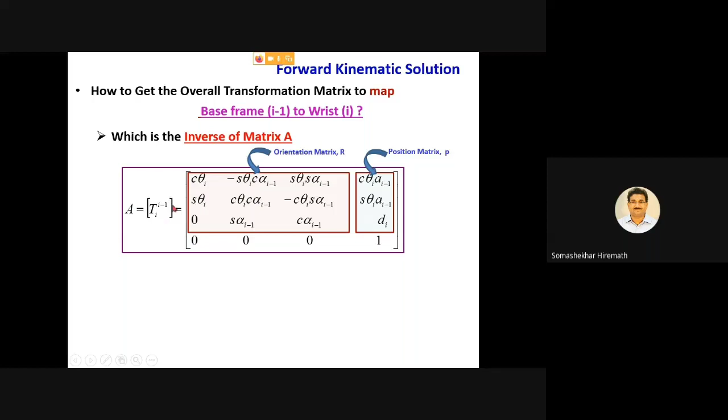Then what they will do, they will take the inverse of this. Then it is a mapping to the I to I minus 1. What is this? This is, look here, this is mapping I minus 1 to I. If you want to get Ti to Ti minus 1, how to do? Take the inverse of this. How to take inverse of this?

This is a R, 3 by 3 matrix. This is a P, positional matrix, 3 by 1. What you will do? This is inverse of A, how to take, R transpose you will take, transpose of this you will take, then minus R transpose into this. You will do, you will get very quickly. R transpose means changing the rows to column. Look here, I am changing the rows to column, R transpose. Then the next one is minus R transpose into P. Multiplied by these two matrix, I will get this.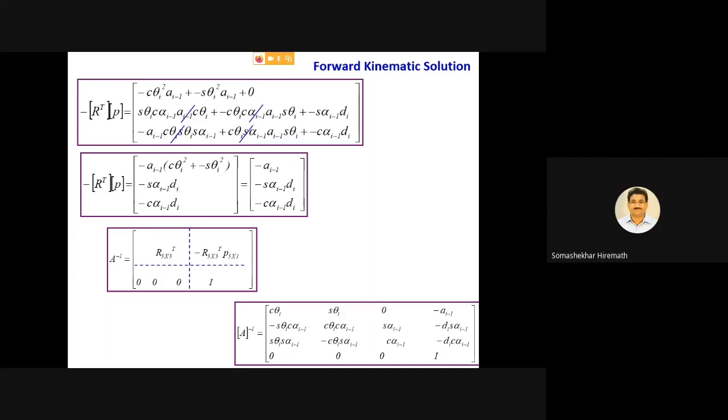After doing all the calculations, you substitute here. What matrix is there? Same thing it is. Now what is it doing? It is mapping from i-1 to i. Previously what I did was i to i-1. You will map wherever you have to map. Or else, as usual, the angular method, as I told, you have to map the same matrix.

Already I've taken 15 minutes. Dhruv Kumar - no problem, sir, actually it's a beautiful session, so time, I don't know how it went. Dhruv Kumar, what I am telling is, I require more time, I think.

Kinematics itself, if I am with you people, it's very easy. But teaching all of it in 1.5 hours is very difficult. I think you are feeling, students are feeling it too. But only in our class, for DH parameters, we teach 2-3 days - that is easy. But here it's very difficult, also I'm not physically present.

No, if you give me a board, I will teach very nicely, it will reach your heart. But now, just moving around doesn't matter. But let the participants understand these things that are there in the exam - kinematics means R matrix is there, kinematic chain is there, kinematic pair is there, prismatic joint is there. If they know this, it is very easy.

Correct, Dhruv Kumar? Yes sir, definitely. Here it's virtual - there's a difference between virtual and real things. Sir, yes sir, all teachers, because they have patience to sit. No, if you ask me elsewhere I will not listen, but you people are saying it's very good, I am very happy. But only thing is, I'm trying my level best to explain to you. Extremely sorry if I don't reach you, because it's mathematics - I want to do it on the board. Very good, okay, thank you very much.